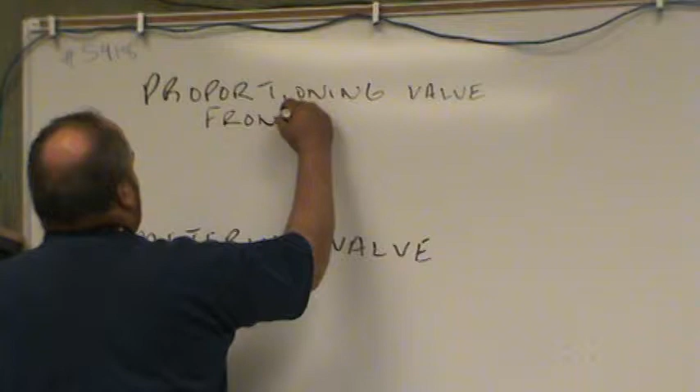The back of the vehicle. I was under the understanding that a proportioning valve would maintain the back. Well, here's the thing. If we have a truck that's got all the weight in the front and no weight in the back, if we apply the same amount of pressure to the front and the back, the tires are going to skid. Why? Because they've got no weight on them, right? So the back tires are going to lock up and the front tires are not.

On the other hand, if we get the proportioning valve set up too hard, the back brakes will never apply. I know what was happening on that Cadillac. Because after all, they apply all the pressure to the front brakes, the back brakes basically never apply. That's why most cars with a proportioning valve, trucks and big cars, are going to have what's called a height sensing valve.

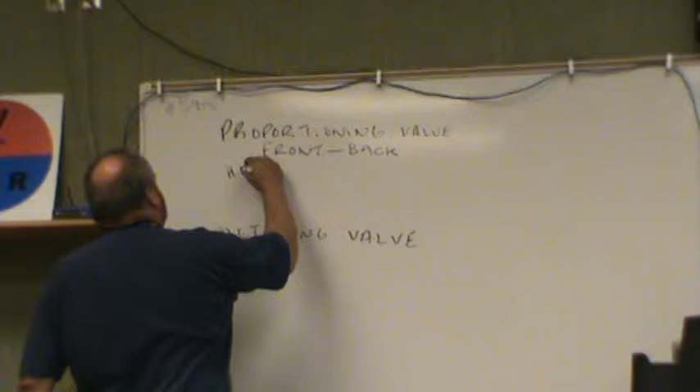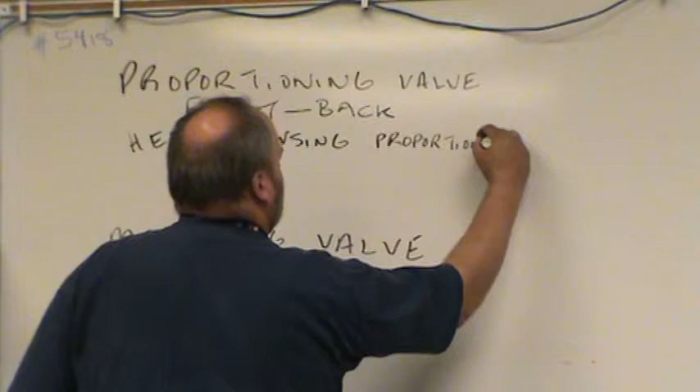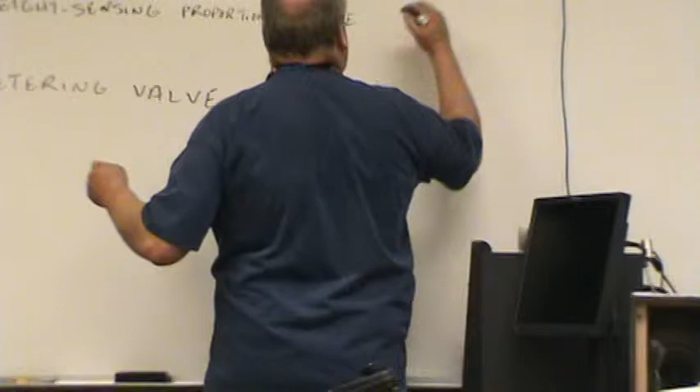So his height sensing valve could have been adjusted maybe a little bit too high, so his brakes were never okay. Well, here's the question they're going to ask you on the ASE, I believe. They're going to say, if I lower this vehicle, is it going to screw up your proportioning valve? Yes, it is. Because a lot of these proportioning valves, you saw where it was on that Cadillac, but on a truck, it'll be like here. It'll come out here with an arm and come down here to the pumpkin.

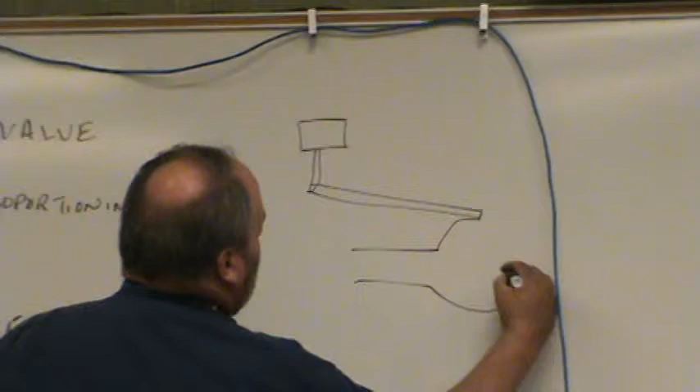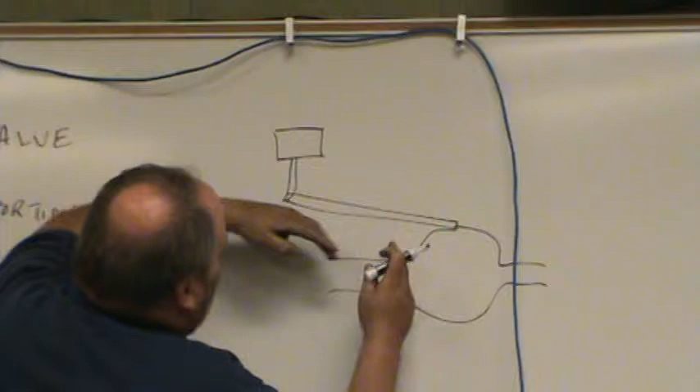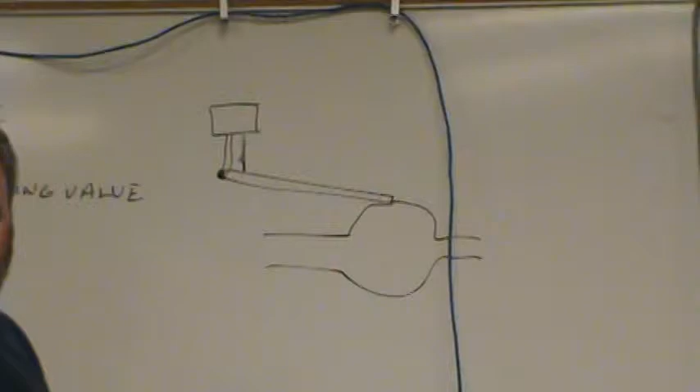So what happens is, as this truck gets loaded more, the distance between here and here changes, and this lever is going to have something that goes like that. That's going to be a pivot right there. So that's a height sensing proportioning valve. And the height sensing proportioning valve works the way it does because of the relationship with how far the bed of the truck goes down when it is loaded.

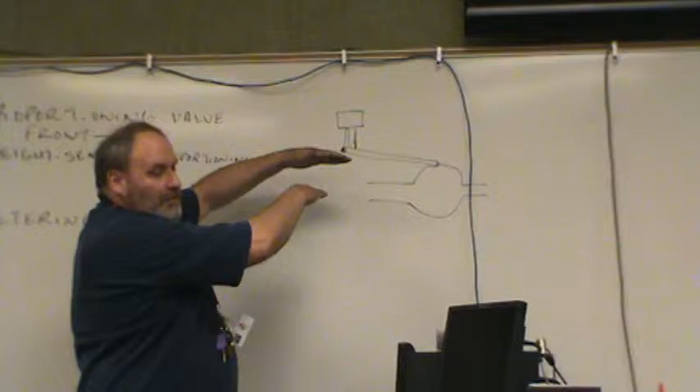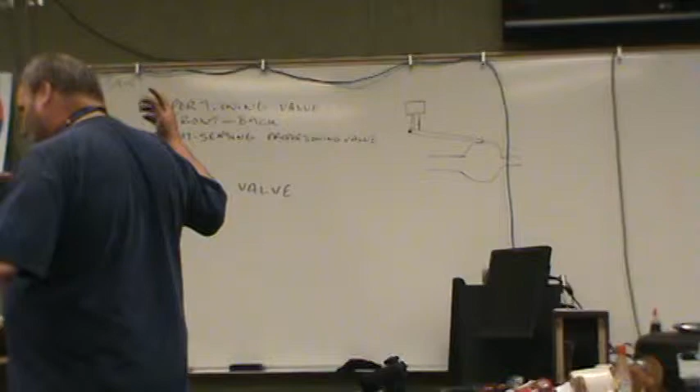When this is loaded much more, we can put a lot more braking force because the tire's not going to lock up. The problem is, in a truck, if it's empty, it's got probably 90% of the weight in the front and maybe 10% of the weight in the back. Which is why, let's think about this, what do trucks tend to do when they're empty? Big trucks. They'll lock up on you. And then what? They tend to jackknife.

Now you know what a jackknife is? Well, here's a jackknife right here. To the side. They call it a jackknife. I'm talking about big trucks, big rigs. Because what happens is, when the trailer's empty and the truck brakes, all the weight is here. This trailer is empty, and it just starts to skid. And if you turn that truck at all, this trailer comes like this. That's why they call it a jackknife.

That's why ABS was such an important advance when it comes to big trucks. But the big trucks don't have anti-lock brakes. They have an air system. All the brakes are always applied. No, they have anti-lock brakes now. Really? Yeah, that's what you've got to watch out for. You can't go by this ancient history stuff.

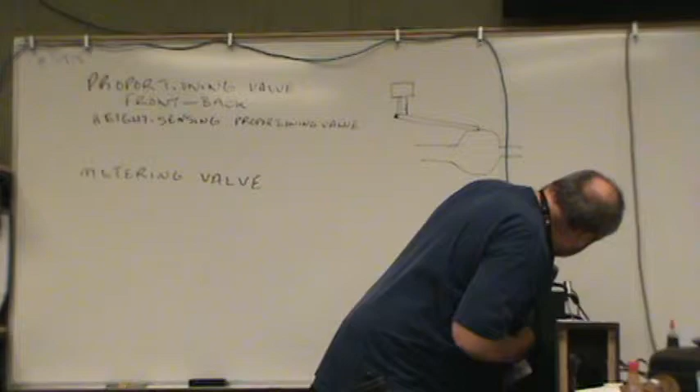So the brakes aren't always applied? The brakes are naturally applied. Because of what? The springs in there, no? Yeah. And then the air separates them? The air releases the brakes. Yeah.